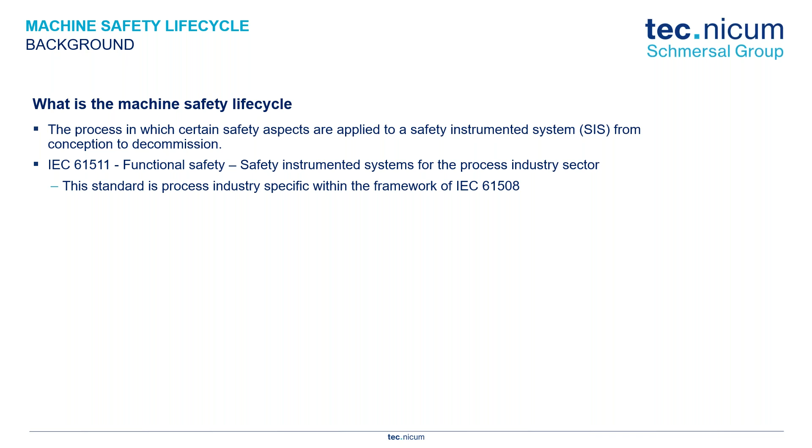There have been so many standards that derive from IEC 61508. For example, ISO 13849 looks at the functional safety of a machine, and we'll talk briefly about that standard later as we look at the cycles of machine safety. But let's look at IEC 61511, because we're trying to understand where this life cycle comes from.

There is a section highlighted in IEC 61511, section 5.2.6.1.3. In this section, it lists the stages in the safety life cycle at which the functional safety assessment activities are to be carried out. We can apply this to machine safety. The good thing about a lot of these standards is that they reference each other, mainly because they all derive from this functional safety standard, IEC 61508.

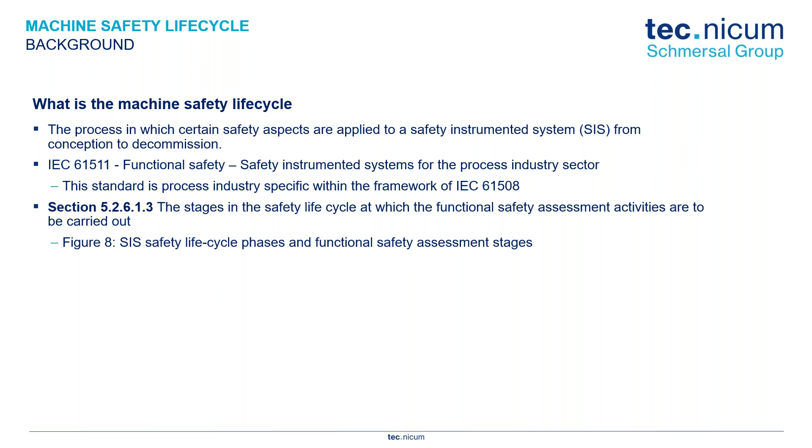Within this section, 5.2.6.1.3, there is figure 8, which shows the different stages where we need to apply these functional safety assessment activities. This is where we start to see these concepts of the machine safety life cycle. What I want to do is give a highlighted view of what these stages are, so this is where they kind of come from. There are plenty of great articles out there to help understand what these stages are, but they don't really go into detail about where this is derived from.

The stages described within the machine safety life cycle would be the risk assessment. We'll talk about what the risk assessment is, and it'll be a highlight of what it is. We do have full-hour webinars and trainings on this particular topic, as it's just one element of the life cycle. So we'll just give a high-level view of what the risk assessment is.

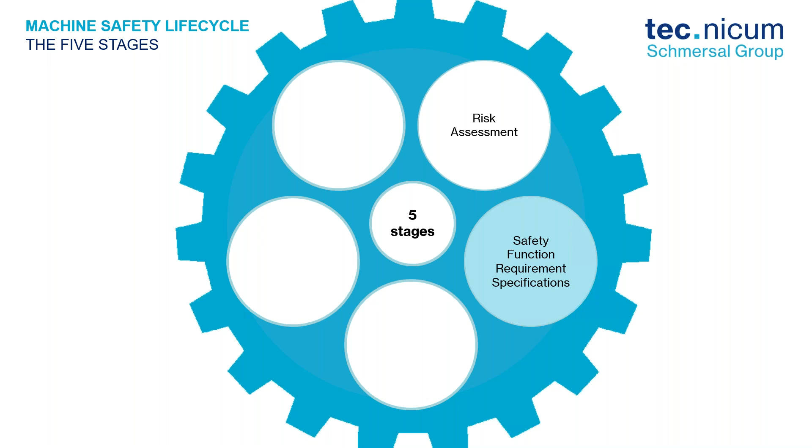Once that's done, the next stage would be the safety function requirement specifications, or SFRS. We'll see what that's about. After that would be the design and verification. Stage 4 would be the installation and validation. The last stage here would then be maintenance, monitoring, and re-evaluating.

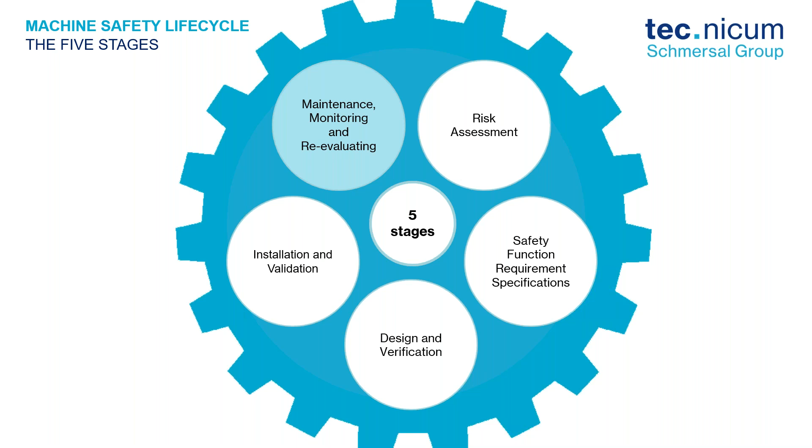So when we look at this, this is the entire life cycle. The risk assessment will be at the beginning part of it, during the conceptual design, and we will look at this over and over again at certain milestones throughout the life cycle of the machine. As we look at the risk assessment, we may find that we need to do some type of risk reduction measures. This then brings in the SFRS. Then we look at the design and verification, so forth and so on. So let's start to look at some of these elements individually.

So the first thing is, what is a risk assessment? That's the first stage of the life cycle here. The risk assessment is a systematic approach or process to identify hazards and evaluate the risks associated with those hazards to determine necessary risk reduction measures.

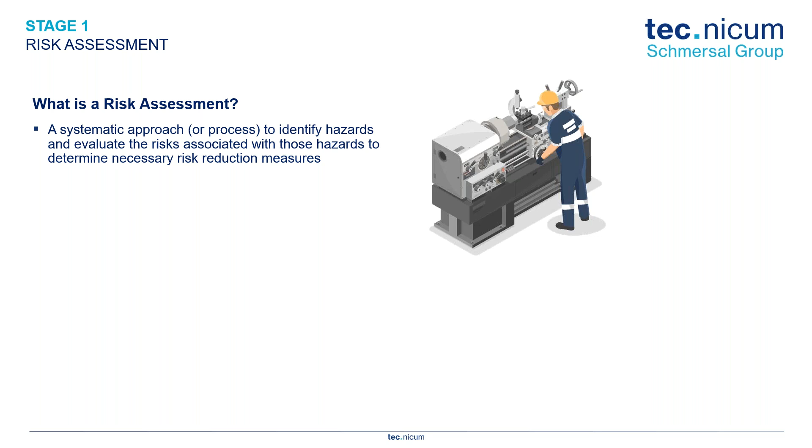There are plenty of standards to help us understand what a risk assessment is, giving us some framework to guide us through the risk assessment. I list here three such standards: ISO 12100, ANSI B11.0, and CSA Z432-16. Now, for those global companies on the line, your organization may gravitate towards ISO 12100, perhaps.

What we see here on this table is a description trying to highlight some of the similarities between these three standards. If we look at the beginning part of ISO 12100, ANSI B11.0, CSA Z432-16 from our friends up north in Canada, the first part is to determine the limits of the machinery. This is going to set the framework of the risk assessment: who uses this machine, what are the different tasks associated with this machine, what are the different roles associated with the machine, where is this machine going. So we start to set the framework of the risk assessment.

The next step would be to identify these hazards. And here we start to see a slight difference between the three standards, where ISO 12100 just focuses on the hazard identification, and ANSI and CSA talk about a task and hazard identification.

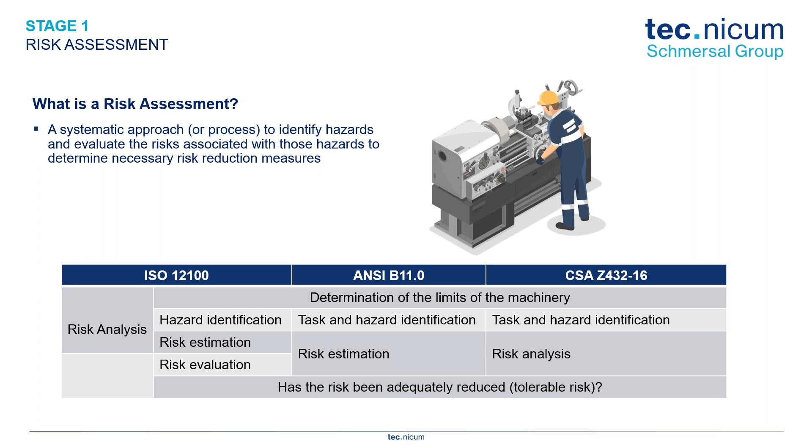When we look at quantifying the risk, you can honestly utilize any method you want. The key thing is making sure that we quantify it, so we have a baseline to work from. The standards will give some guidance on how to quantify this risk, and the two main parameters they focus on are the severity of harm and the probability of occurrence. We have full-blown webinars and trainings on this process, so we're not going to spend too much time since we do have other stages to focus on.

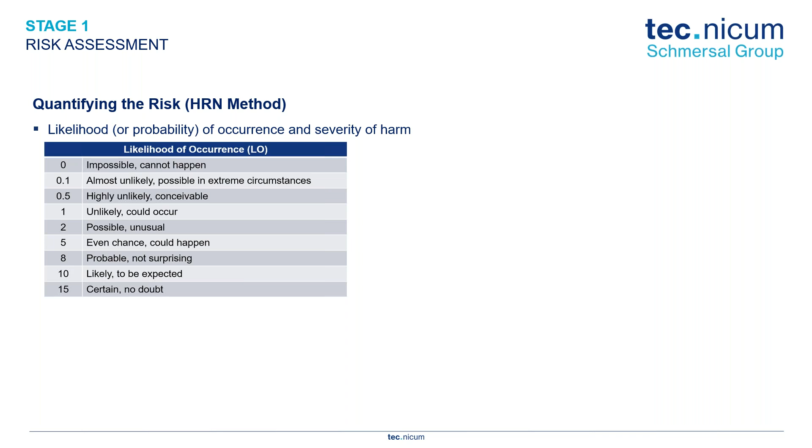Again, you can use anything you want for estimating the risk, and we often show the HRN method. This is something we use and is used commonly throughout the industry. This hazard rating number, HRN, is where we calculate a numerical value for the risk estimation. They use four parameters: the likelihood of occurrence, frequency of exposure, degree of possible harm, and number of people. I've seen the same parameters for HRN used with different numerical values. You can honestly create your own, use an Excel file, create your own numbers and define the parameters differently, whatever makes sense for your organization and the machines you're using. But that's the main thing: we want to estimate it.

This is the first part of the machine safety life cycle, this idea of the risk assessment. Let's look at the machine, let's identify the task, let's look at the hazards and the risk associated with this, let's estimate this risk.

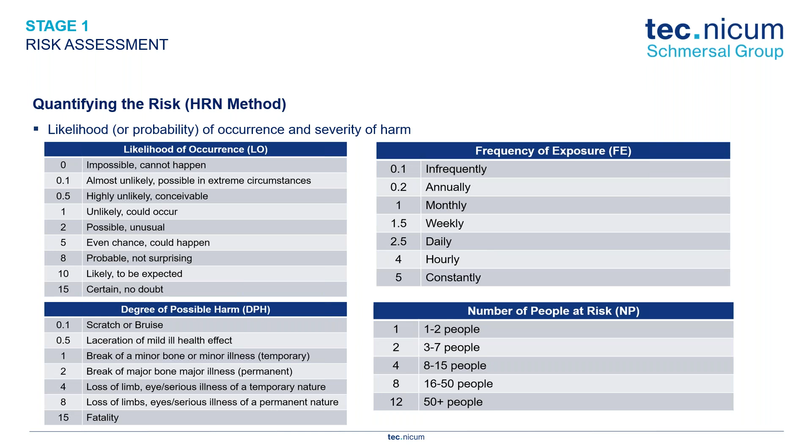Stage two is this idea of the safety function requirement specifications, SFRS. Again, what is that, what are we looking at? So when we look at the SFRSs, these are the specifications containing the functional safety requirements for the risk reduction measures. Stage one, you identify hazards and risks, you quantify them, and then we say, okay, do we need to do anything about it? Stage two is, well, if we do need to do something about it, let's design what we need to do.

So some of the things that will be part of the SFRS would be something like the safety matrix. What safety functions are we adding, and what do we want those safety functions to do? What's going to be the triggering event? If it's an e-stop, we have an emergency condition with the e-stop. What do we want to shut down? What's that process? We have a guard door interlock, or a light curtain, we interrupt the light curtain. What are we expecting to turn off? What drives, what motors are we turning off? We create a safety matrix. We want to add guarding based off of our risk assessment.

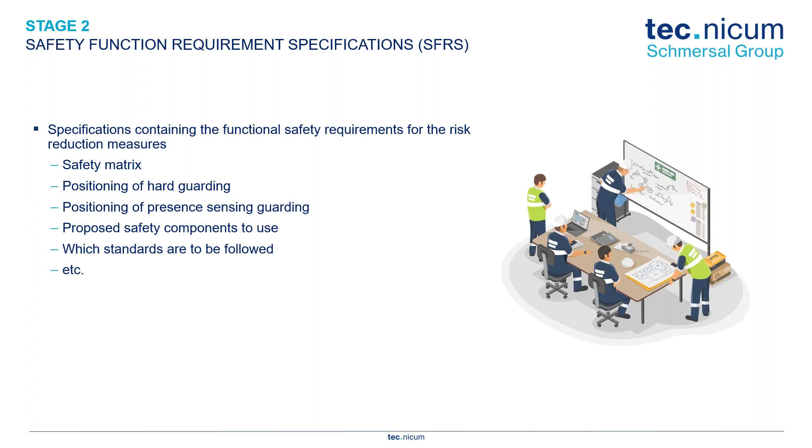When we're trying to have some risk reduction measures in place, we fall back to our hierarchy of control measures. I'm sure many of you have seen something like this before in some form of safety training. So when we look at a hazard, we're trying to reduce the risks associated with the hazard.

Again, trying to formulate this SFRS, we say, okay, well, can we eliminate this hazard, this potential source of harm? Like, can we get rid of it? Can we redesign this part of the machine to eliminate it? That's the first thing we want to try to implement.

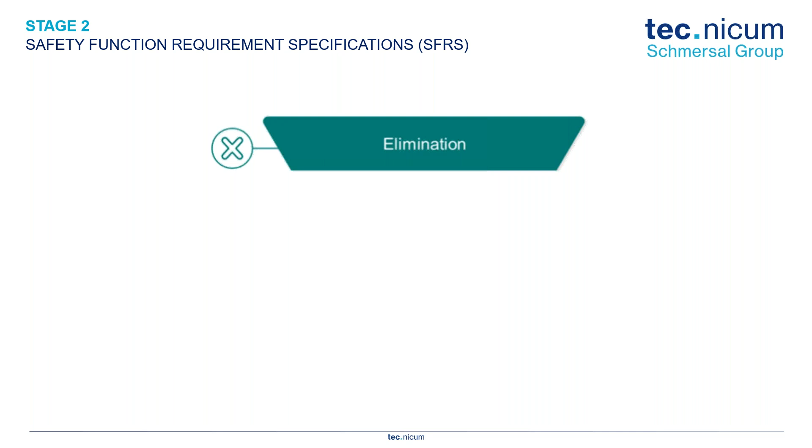The next thing is, well, if we can't eliminate it, can we substitute it? Can we implement a less dangerous hazard than what we just identified? A lot of times I refer back to the example of using chemicals for a process, and we identify this very dangerous chemical. Can we substitute this dangerous chemical for something less harsh? Can we substitute this immediate danger?

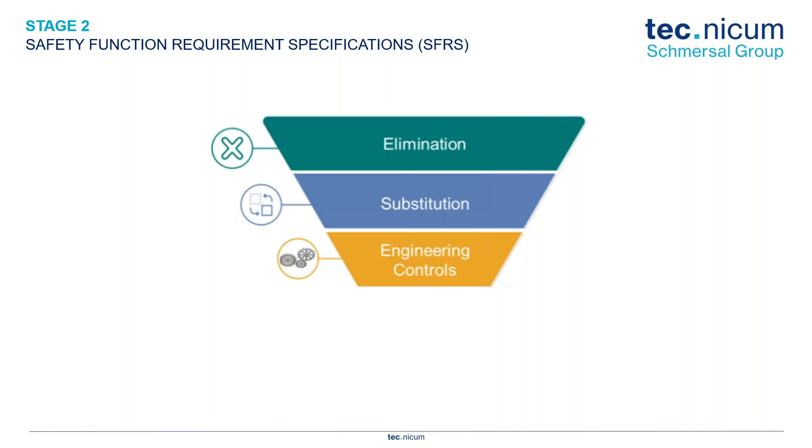If we can't substitute, or we need to apply further control measures to reduce this hazard rating further, we then look at engineering controls. Can we apply these hard guards? Can we apply some type of safety component within the industry? Do we have to develop a safety function?

Then it would be, all right, what about administrative controls? Training, restrictive access to these hazardous areas or to these hazardous pieces of machinery. And the last thing would be providing personal protective equipment, just some PPE. Typically, what you will see is a combination of these.

For an existing machine, again, we think about the full life cycle of a piece of equipment. For a new machine that we're trying to design, we may have a higher chance to eliminate an identified hazard. For an existing machine that's been running for 5, 10, 30 years, we may not be able to eliminate the hazard.

We may not even be able to substitute the hazard, but we should be able to maybe try to implement some type of engineering controls. And a lot of times, again, you may see a combination. So we're going to implement some safety interlocks on there. At the same time, we're going to implement some additional annual training.

So that's going to be some administrative controls. And we evaluate the process, and you know what? Because of this process, we might need some cut-resistant gloves. So now we start to add in some additional PPE. So a lot of times, you may see a combination of these control measures.

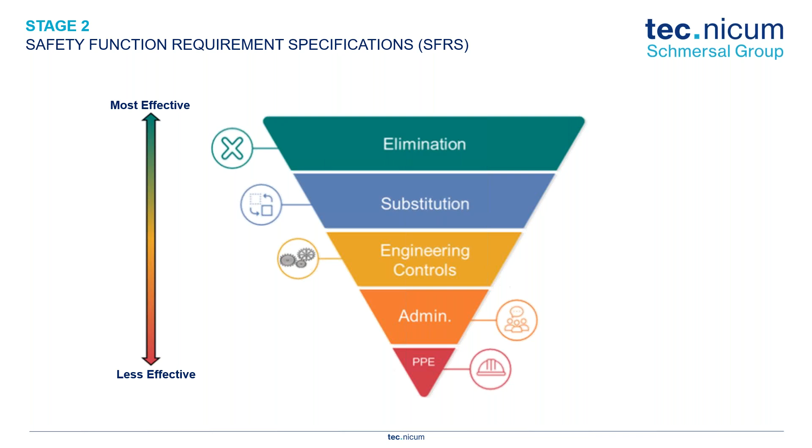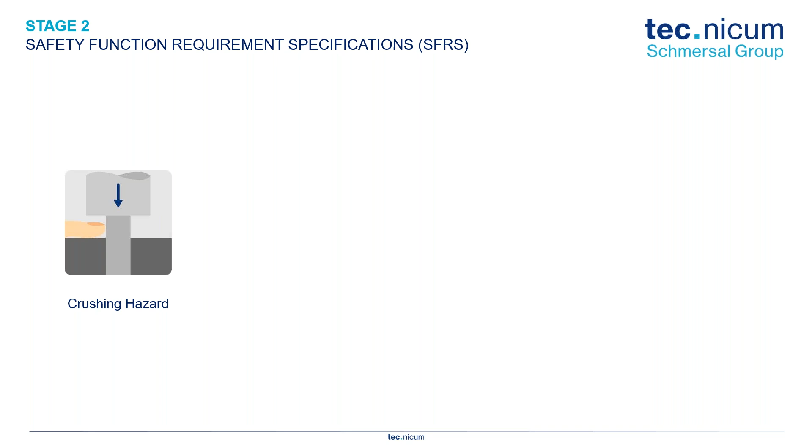If we think about that, and look a little further into trying to reduce the hazard we've identified, or reduce the risk from this potential source of harm, because if we identify a crushing hazard, as shown here in this picture, okay, fine. First thing is, can we design this hazard out? So can we, in this instance, change the shape of this potential source of harm to eliminate this crushing hazard?

Again, when we are doing the design, doing the conceptual stages, we may have a higher chance for this. Existing machines, maybe not so much. And honestly, even when we're doing the conceptual designs, we may not be able to design it out, but again, we may have a higher chance to do it at that point.

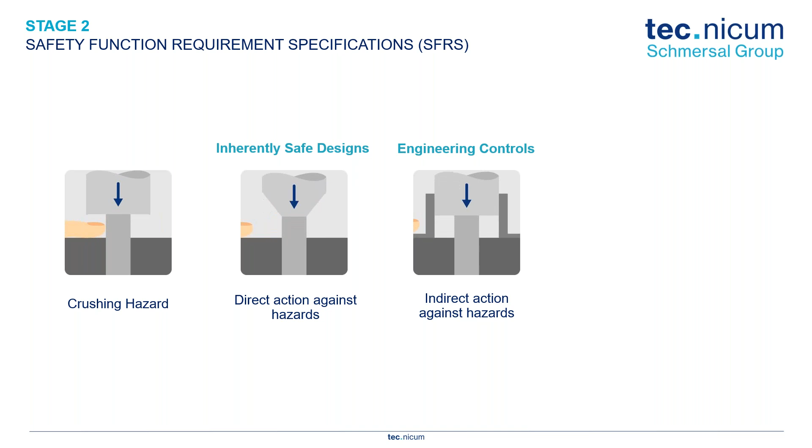If we can't design the hazard out, we say okay, can we implement some engineering controls? The hazard still resides with the machine, but let's add some hard guards to prevent access to the hazardous point. The last thing would be to add signs, to warn of the hazard. Typically you'd see a combination of engineering controls and warnings. On a machine it would say there's a crushing hazard, and it would also say do not operate without guards in place. Adding a sign is a step we can implement.

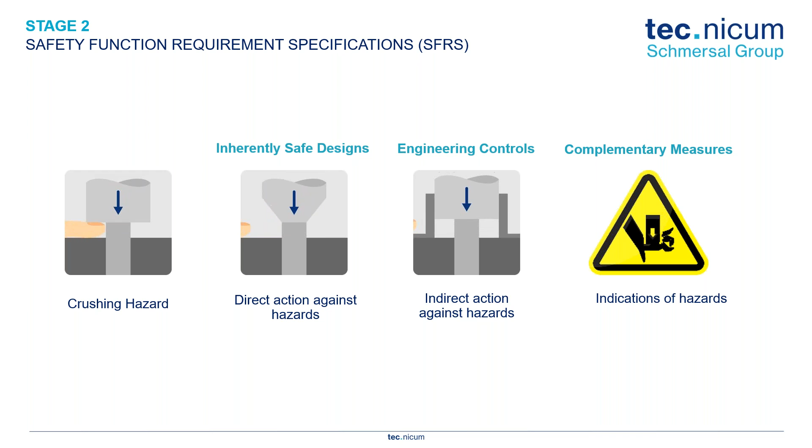But this does not mean we can go right to adding a sign. We can't go through our assessment and say, okay, we have a hazard, this hazard is rated as serious, let's just add a sign. That is not how it works. We have to go through this process: see if we can design it out, see if we can add engineering controls, and then finally see if we can add signs.

Once we go through that process of trying to piece together what our SFRS is, this package, what are we adding to it, then we say okay, let's go ahead and do our design and verification. Let's go ahead and design what we are trying to implement.

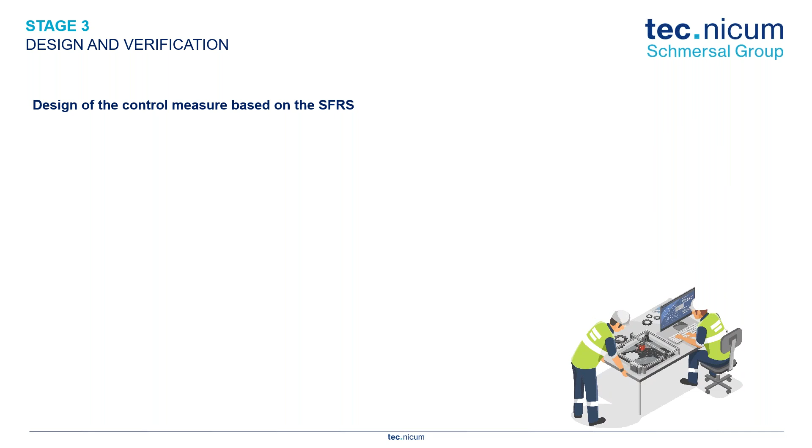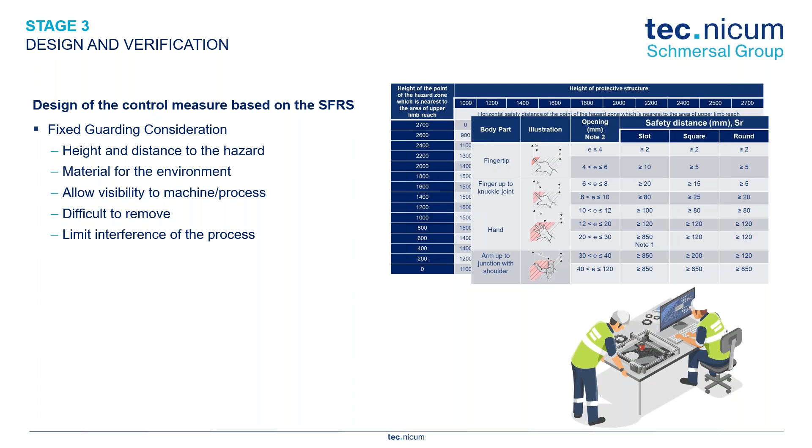When we look at things we're trying to design and verify, if we're saying let's use hard guards, the idea of fixed guards, we say okay, how high and how far does the guard need to be? We'll use standards like ISO 13857, or some of our ANSI standards like ANSI B11.19, to see how high the guard has to be in relation to the hazard and the distance of that hazard. Based on the openings of the guard, how close can we be to the hazard? We want to make sure we can't put our finger or hand through the opening and reach that hazard. There are tables and charts within these standards that help guide us on where to place these guards if we're using fixed guarding for our control measure.

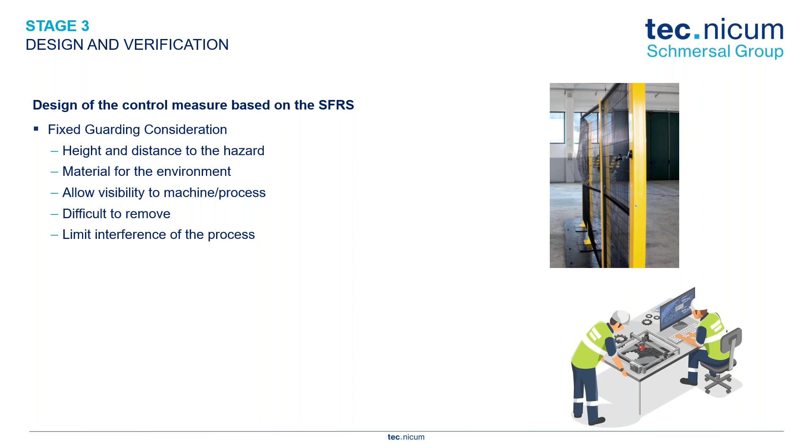We also want to make sure we use the right type of material if we're using hard guards. Is this guarding going around an application where there will be projectiles? Are we guarding a robot cell? Is this an area with heavy washdown using high temperature, high pressure, caustic chemicals? Can this hard guard withstand that environment? These are things we have to consider when doing our design.

If we're going to use hard guards, we want to give the operator and maintenance personnel the chance to actually view what's going on inside the machine. If we restrict access so they can't see inside, especially for maintenance tasks, it heightens the chances of bypassing guards. Just because someone can't see inside the machine doesn't mean it's okay to bypass a guard, but it introduces that possibility. So if we want to allow visibility into the machine, let's provide guarding that does provide that.

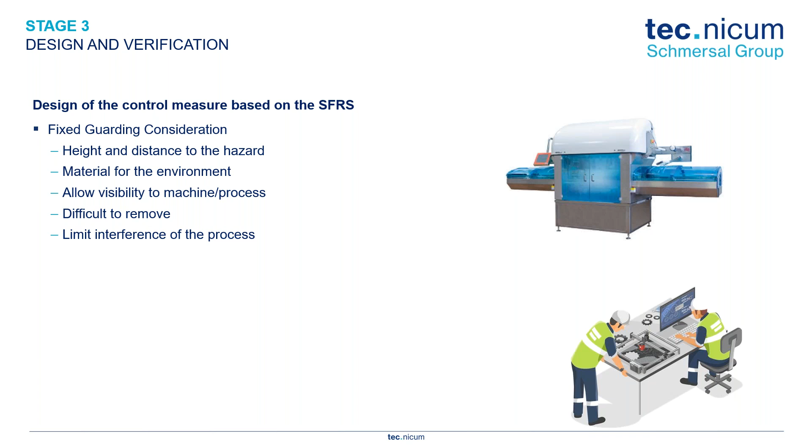Even when you look at mesh, there are holes in the guarding, and one may think, fine, you can see past the mesh. But consider the difference between black mesh and yellow mesh, where yellow is often seen as the color for safety. If you apply yellow mesh all around a machine and all over the plant floor, it's going to be difficult to see past it into the machine because the light reflects off the yellow mesh. Whereas if you use black mesh on fencing, you can easily see past it to see what's going on inside the machine. Something we probably don't even think about, but something to consider.

The last few things here for guarding, as we do our design and verification stage, we want to make sure the guard is difficult to remove. The standards call for using fasteners that require a special tool for removal, and we want to make sure we're not interfering with the process too much. We want to make sure people are safe, but at the same time make sure people can do their job and remain efficient.

Studies have shown that a properly implemented safety solution can, believe it or not, increase productivity. So we have to figure out what works best for this application, what works best for this machine.

If we are trying to design safety functions for access guards, anytime we have a guard that can move, we need to monitor this guard. We would apply some type of interlock device, whether it's a limit switch, a key interlock switch, or a locking device, depending on what the risk assessment dictates.

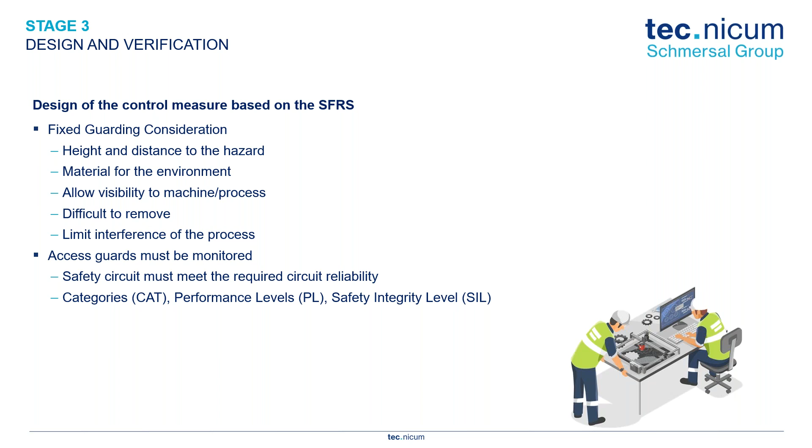If we say we're going to add a safety device to monitor this guard door, we then have to determine what type of safety circuit we need to design. This takes us to another realm of standards, such as ISO 13849. We have another webinar on this topic, so we won't go into too much detail on what a performance level consists of and how we do the calculations.

But if we add a safety function, such as an interlock, a light curtain, or a safety mat, we need to determine what that performance level requirement is — what do we need to design this safety circuit to: Performance Levels A, B, C, D, or E.

In order to determine what safety function or safety circuit we need to design to, we can look at these parameters: S, F, and P — severity of injury, frequency of exposure, probability to avoid the hazard. For an existing piece of machinery, if we want to examine where we are with our safety circuit, we may be focused on just the category.

If it's a single channel system, a dual channel system, monitoring, things of that nature — we're trying to implement a new safety function, a new machine — we can look at the performance levels and the safety integrity levels.

Not to go too far off topic for this stage 3, but what we're looking at for performance levels and SIL ratings is how reliable this safety circuit is. Those are some of the parameters required for performance levels — we look at the category, the diagnostic coverage, the mean time to dangerous failure. These make up a performance level. That's a whole other training, a whole other webinar.

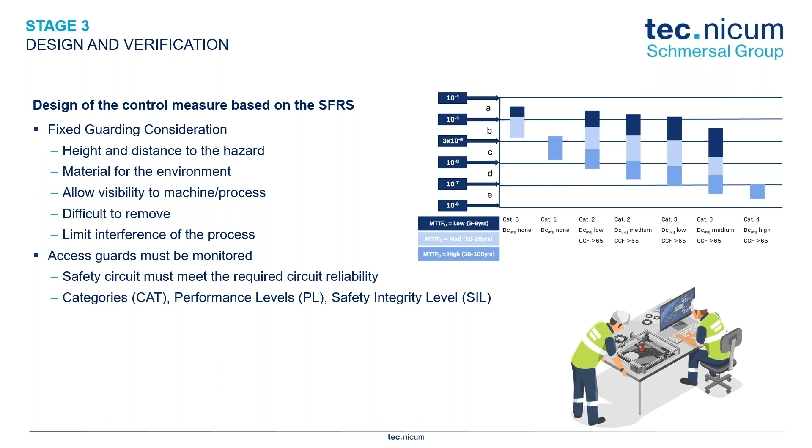When you look at the verification side of it, based off our performance level, for example, let's do some calculations using Sistema — which is a free software you can download to help do those calculations for a performance level.

So you've done your risk assessment, your safety function requirement specifications, highlighting what you want to do for your control measures. You do your designs — your safety circuit designs, your block diagrams, your bill of materials — and now you go through your installation and validation.

As far as installation goes, this needs to be planned out. If we talk about an existing machine, we need to find out when we can have downtime to actually implement a new safety function. If we're designing a new machine, do we have the material for the different parts of the machine?

Are we going to use in-house personnel, or are we going to use a third-party contractor or consultant? If this is a new machine, does the OEM have the resources to implement the safety aspects of this equipment? Do they understand safety, or do they need to also farm that out to a safety consultant?

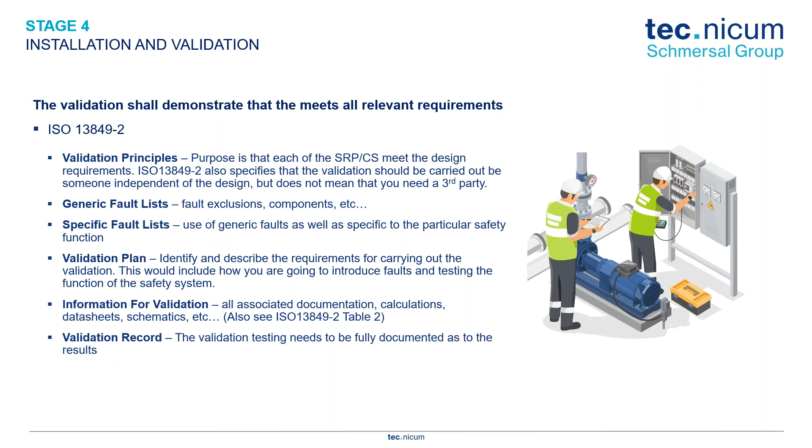This goes into more detail on those individual steps, what the validation plan or record should look like, and what type of information should be part of that. It also calls out a very specific requirement that the person who does the design and wiring should not be the one to validate the system. If I designed the system and wired it, I might have my blinders on when trying to actually validate the safety system. That's called out specifically within ISO 13849-2.

The last stage, stage 5 of this machine safety life cycle, is maintenance, monitoring, and re-evaluating. This would include certain periodic tests for the safety functional requirement specifications. For example, if you're using light curtains and safety mats with E-stop controls, we really need to do an annual stop time analysis on this equipment.

As we use equipment more and more, there's going to be wear and tear. The machine may take longer and longer to come to a safe condition once you interrupt the light curtain. Because of that, we need to do a stop time analysis on the machines to see how long the machine now takes to reach a safe state. Over time, we may need to add additional methods to bring the machine to a safe stop quicker, or reposition this presence sensing device further away from the hazard based on a safe minimum distance calculation.

This is part of the maintenance and monitoring. Looking again at ISO 13849, the functional safety standard for machinery, we do calculations to determine what the performance level is. We also do calculations to determine when there's a high chance of experiencing a dangerous failure with this component, with this safety function.

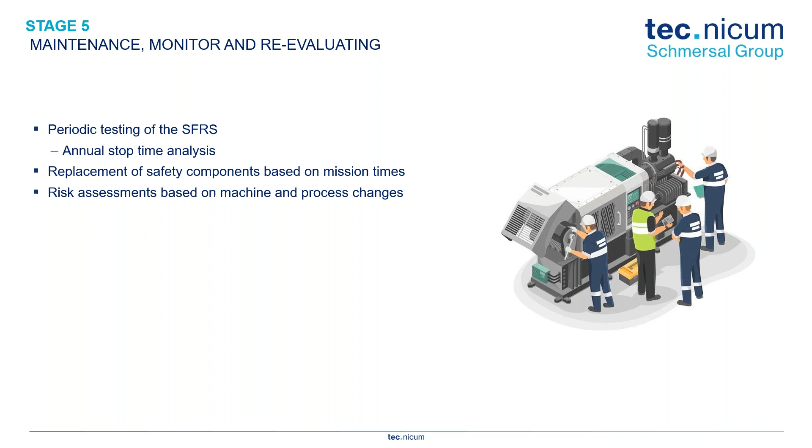This last Friday of June is designated on the national calendar as National Safer Workplace Day. If we think about the concepts here, SAFER is an acronym for Stop, Assess, Formulate, Execute, and Review. This was created by Schmersal because we wanted to highlight the importance of safety, not just with machinery, but within the industrial environment.

When we look at what we're trying to implement and promote here, it's: let's just stop. We see something dangerous, we see something that's not right, let's stop. This can be machine related or just anything within the industrial environment. We see something that's not safe, let's pause, let's stop, and then let's assess the situation.

Let's find out what's going on. Is this something we need to address with policy or process? Is this something we need to address with a control measure, like with the risk assessment we just went over? Let's assess the situation, and part of that assessment can be going through a hazard rated number, an HRN, or if we look at ANSI B11.0, some type of matrix to say, based on what we've assessed, we may need to add some type of risk reduction measure.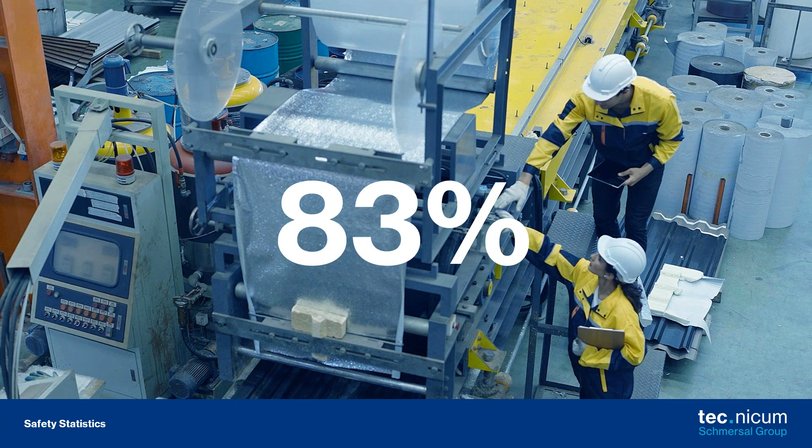We have 3 quick pieces of data we show here. 83% of active workers in the U.S. have seen some sort of workplace emergency while working. That's an amazing number. It doesn't go into what that emergency is or how serious it is, but it's an emergency. And that can be life changing, whether small or catastrophic, for the person who experienced it or witnessed it.

We always want to make sure we go home the same way we went into work, right? This stat was provided by Forbes. The next stat would be 50%.

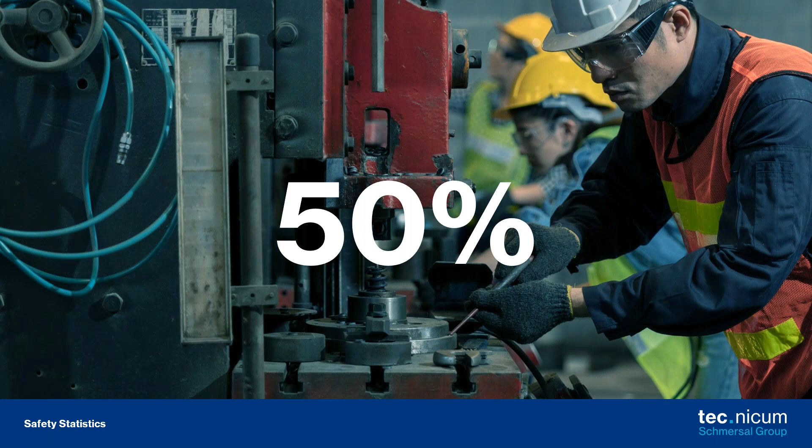A workplace safety program reduces injury by 50%. That is a high number, and all you're doing is implementing a safety program. Yes, it does involve some work, from the top down, and it needs acceptance, buy-in. But if we have a plan in place, a program, we can see this huge number of 50% of injuries being reduced. Again, this could be a light injury or something catastrophic, whatever it is. We can save someone's life. We can save someone from a life-altering situation.

This stat is brought to us by the American Society of Safety Engineers. The last stat would be 43%. What are we looking at with this stat? 43% of workers believe that the employer could be doing something more to reduce safety incidents.

When we look here in the States, at OSHA, the requirement is for the employer to provide a safe working environment. To me, this is a high number — people going to work not essentially feeling that safe, or feeling like their employer can do something better.